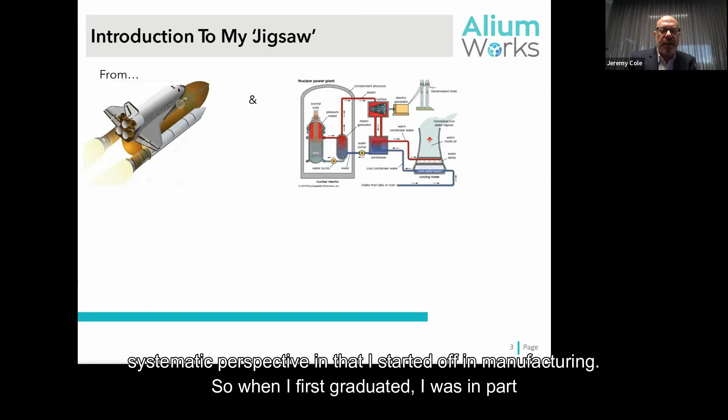I look at things through a very process systematic perspective, in that I started off in manufacturing. When I first graduated, I was part of a manufacturing firm that manufactured components used on the space shuttle, in nuclear power plants, oil and gas industry, etc. So therefore, failure was not an option on a number of those things.

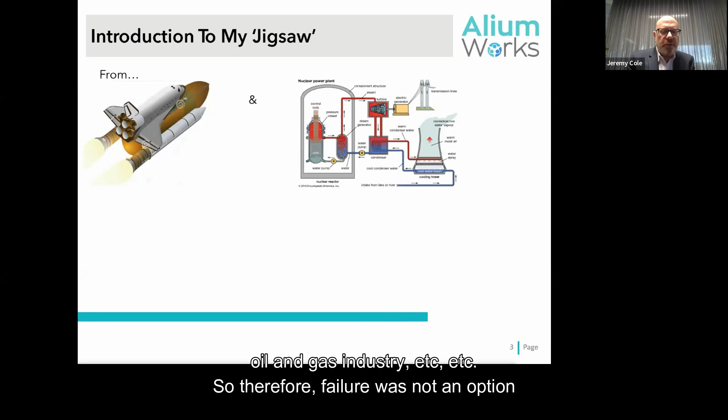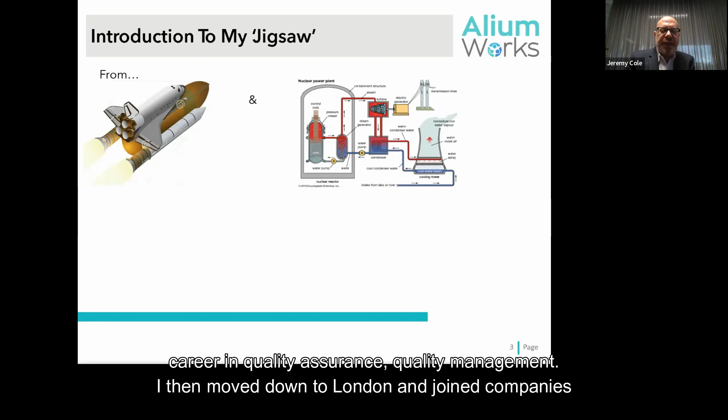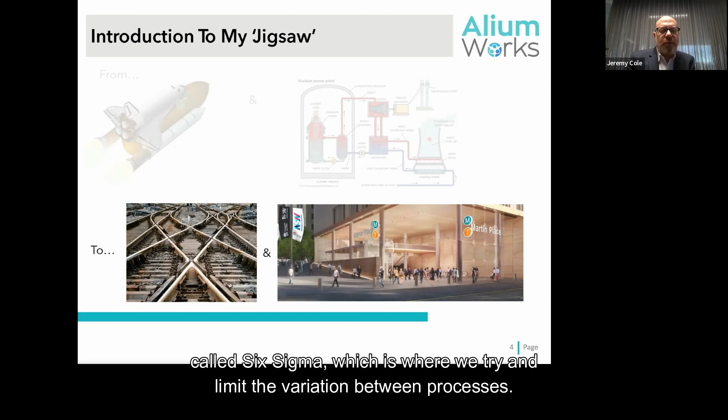I focused the beginning of my career in quality assurance, quality management. I then moved down to London and joined companies like London Underground, which then became Tube Lines. Joined the rail industry and focused a lot on something called Six Sigma, which is where we try and limit the variation between processes. But again, it was very systematic, very process orientated.

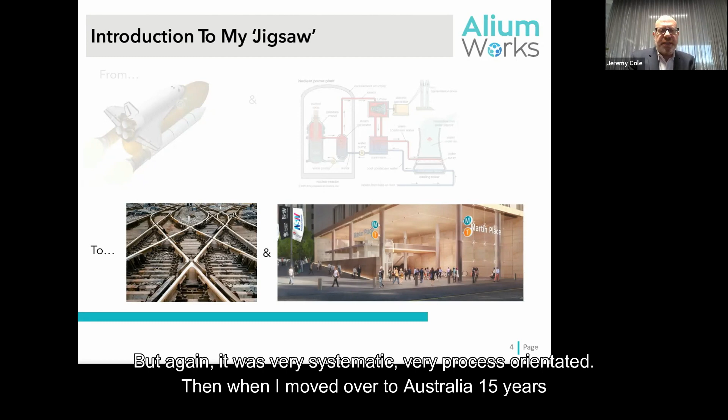Then when I moved over to Australia 15 years ago, I came into the rail sector, but looking at it through a construction lens. And that's where I find myself today, working in the construction industry, mainly looking at rail projects, but as Lend-Lease like to have their cake and eat it, they tend to get me looking at other projects as well these days. So it's not just rail projects.

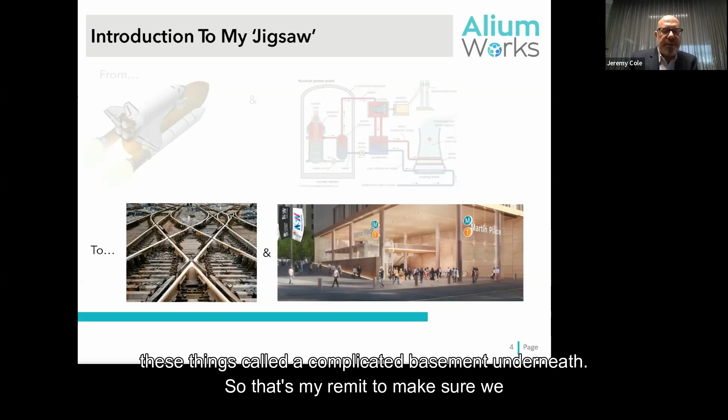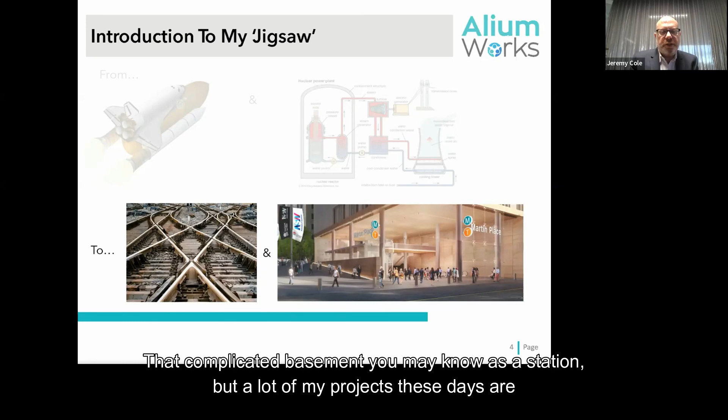And also, Lend-Lease don't do rail projects. They build large, shiny buildings, and they have these things called a complicated basement underneath. So that's my remit, to make sure we can open that complicated basement and link it up to the rest of the railway. That complicated basement you may know as a station. But a lot of my projects these days are the complicated basements underneath our nice, tall, shiny buildings.

So where did rail assurance really originate in this country? I always use the Granville rail disaster as my example. Happened almost 50 years ago, and what had happened is a train derailed, and as it was coming into the Granville train station, my understanding of that disaster was it derailed due to poor maintenance of the track.

However, that derailment, as bad as it was, got a lot worse when the derailed train struck the pillar that was holding up the bridge near the Granville train station. That in turn caused the bridge to collapse onto the carriages that had derailed, crushing them. So that ended up with 84 people dying. As a result of that, they realized they need to build rail infrastructure that considered what safety and what might happen and minimize those risks, but also make sure that the assets were fit for purpose.

So that leads me into what do we mean by rail assurance? I like to think of rail assurance as three pillars that support what we call a safety argument.

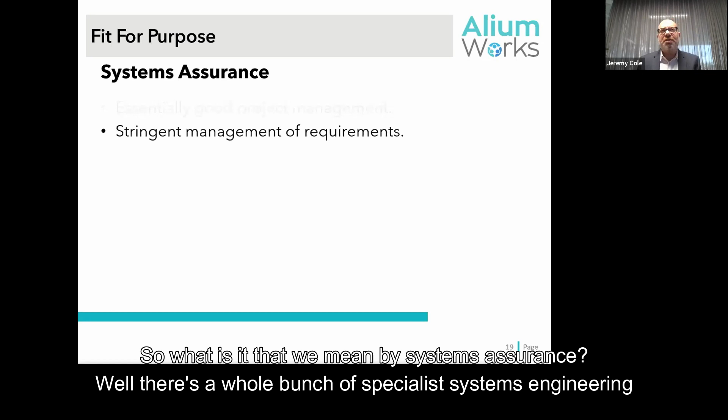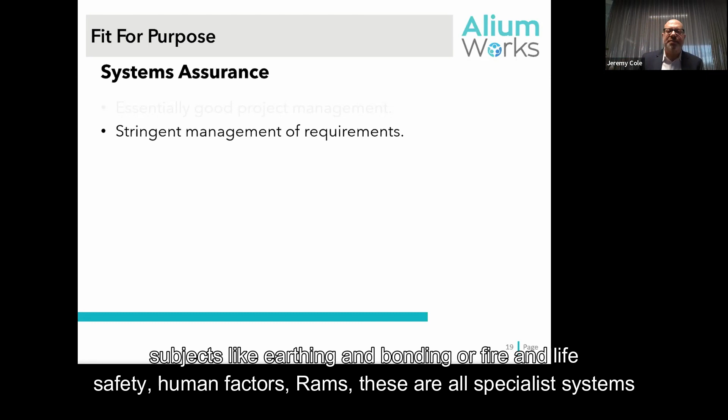So what is it that we mean by systems assurance? Well, there's a whole bunch of specialist systems engineering subjects like earthing and bonding, or fire and life safety, human factors, RAMs. These are all specialist systems engineering things that you need to consider during the design phase of a project.

You have a RAMs analysis undertaken, you have a human factors analysis undertaken. All of these specialist reports - security, blast, fire and life safety - all of these specialist areas come up with a report on how that design could be improved if you did a number of things. What they come up with at the end of it is saying, yes, I believe this design is safe from a fire and life safety perspective if we do X, Y, Z. So they're going to come up with a series of requirements.

There's also the original technical requirements that you get given when you do the project. So there's a number of different sources of these requirements, and these requirements could be the original technical requirements, the derived requirements that you come up with, the safety requirements - all these things. What is systems assurance?

Well, dumbing it down, and I'm sure there's people far cleverer than I am on this call who are nodding or shaking their heads vigorously because I've dumbed it down too much. But in my mind, systems assurance is simply about stringent management of those requirements.

By stringent management of those requirements, we mean there's traceable evidence to where we met that requirement in the design phase, where we met that requirement in the construction phase, where we can demonstrate we've still achieved that requirement at point of handover.

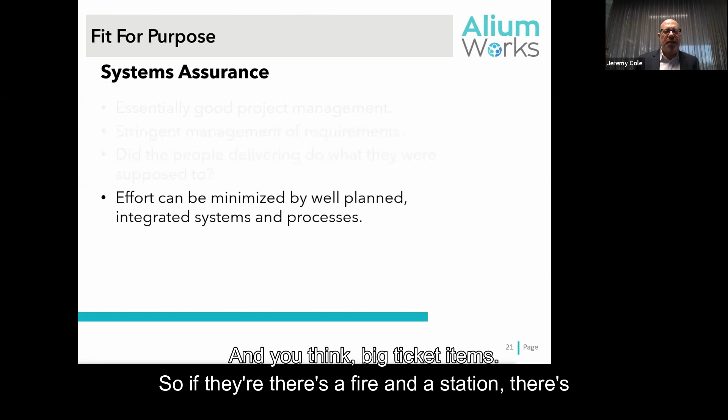Top down is systems thinking, how am I going to get the risks managed, and you think big ticket items. So if there's a fire in a station, there's a whole bunch of other systems that need to contribute to help mitigate the effect of that fire.

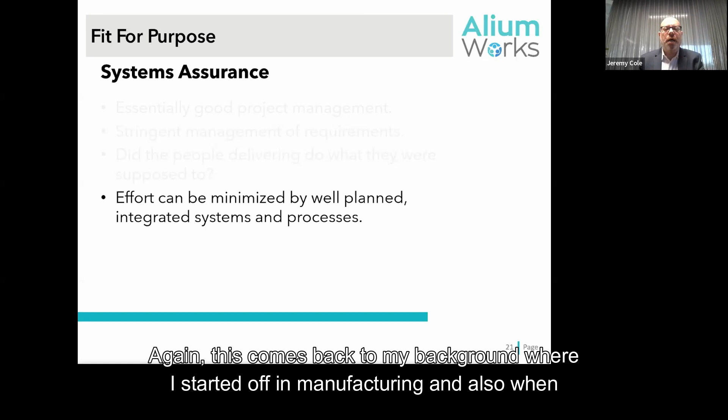Effort from systems assurance can be minimized by well-planned, well-integrated systems and processes. Again, this comes back to my background, where I started off in manufacturing.

And also when I came into the construction side of things, I started off looking after things like quality management, then moved on to looking after quality and risk, and then quality, risk, and project administration, which is all the document control stuff, and then started taking on things like safety assurance, commissioning, operational readiness.

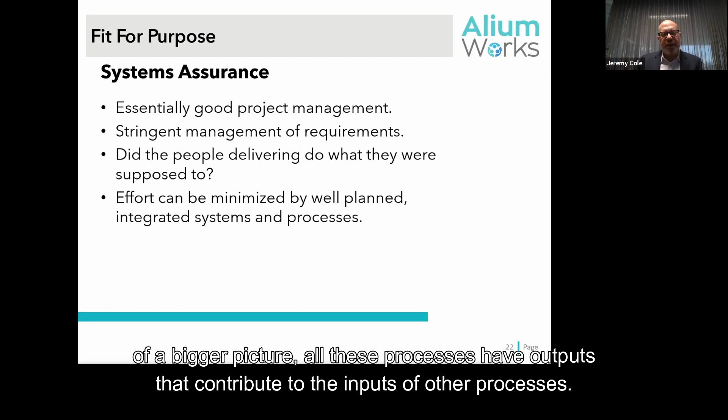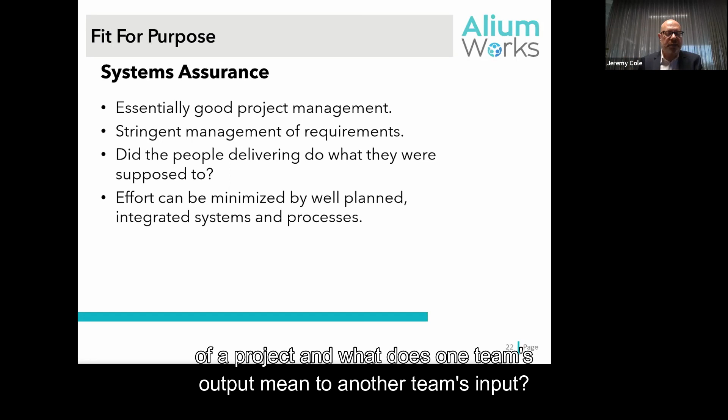And suddenly you realize everything is actually part of a bigger picture, all these processes have outputs that contribute to the inputs of other processes, and understanding how everything links together means you can think end-to-end life cycle of a project, and what one team's output means to another team's input. So if you plan and integrate your systems and processes well, it means good.

It means that your requirements management efforts are minimized. Finally, the third pillar is management of competence.

When I came into Lend-Lease and they were new to the AEO or TAO game, I had to say, look, you need to demonstrate you guys are competent to do the work that you're doing. They just guffawed at me because, quite frankly, they'd already been building these things for years.

Barangaroo is 9 individual buildings connected by a single basement, so it's 9 individual operating entities all integrated into one system. So yes, they can do that.

What I mean by management competence is we have an auditable trail to demonstrate that we've assessed someone to be competent.

For us at Lend-Lease, it was definitely a case of the difference between managing the delivery of the asset and being technically accountable for what's delivered.

So again, on an assurance framework, you are signing off quality records, and if you are signing off those quality records, you need to know what good looks like.

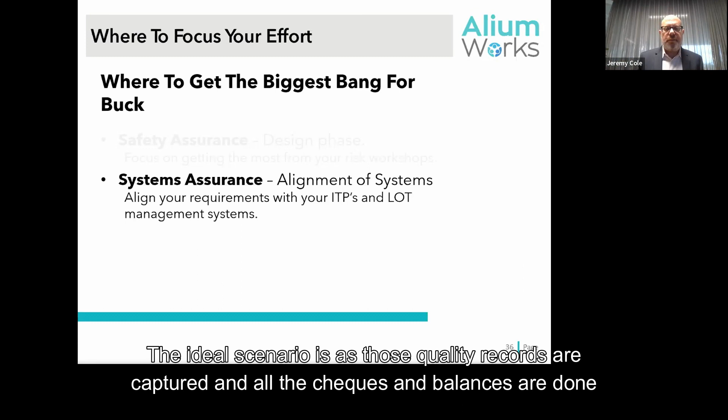The ideal scenario is as those quality records are captured and all the checks and balances are done, and you've got competent people in the quality team and engineering team standing up and saying yes, that quality record is complete and the ITP is closed - or rather, the ITPs are complete and the lots are closed. That should be your evidence: if the ITP was filled in, all the records done, the lot closed, and all the NCRs finished, I can rely on that and close out that associated requirement. You shouldn't need to go back and check everything's done because you've got competent people doing that already earlier in the process. So this is all about having linked up processes and competent people managing them, and a good systems assurance team should link it all up at the beginning, so that as you finish your quality records, by definition all your requirements are also closed.

Talked a lot there, I'll probably get a few questions on this one. So lessons that can be applied: managing expectations of output. That's building assurance into the procurement phase, and end of story - that's how we can make sure people are delivering what we expect them to deliver.

Also, when you're working on my side of the fence with the contractors, you're not surprising the consultants by expecting them to deliver more than they've actually priced. Being fair - a good project is where everybody wins. The design consultants make money, the contractors make money, the client gets exactly what they want for the budget they paid for, on budget or ahead of time.

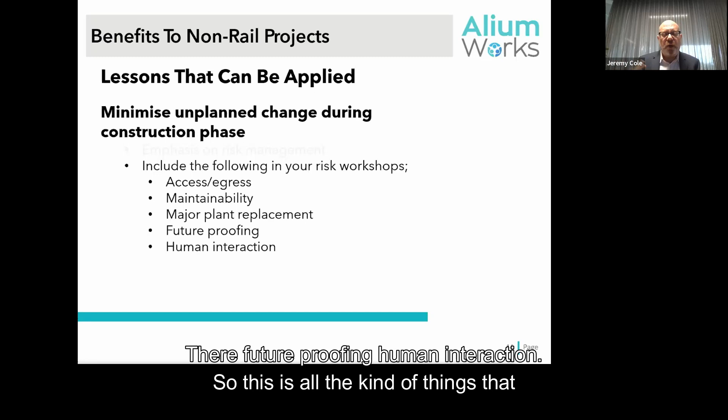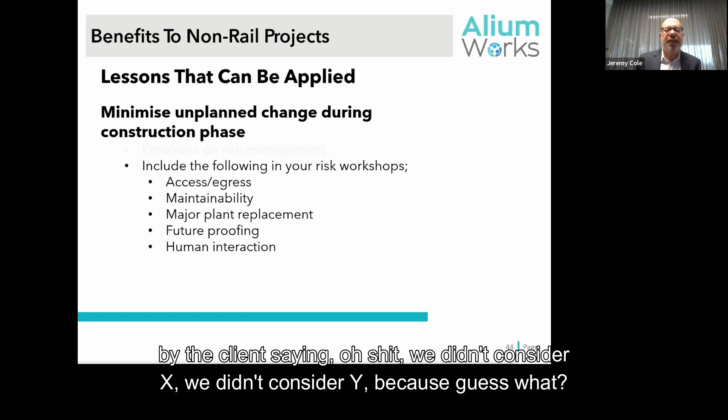Human interaction - this is all the kind of things that you need to consider earlier on, so that you don't have many variations and you don't get surprises by the client saying, oh shit, we didn't consider X, we didn't consider Y. Because guess what, you had all this opportunity to, and you've engaged the right people to do it.

This is my last point here. You've engaged the operators, you've engaged the maintainers, you've engaged the external stakeholders from a very early stage, so they've got as much ownership of the output as you do.

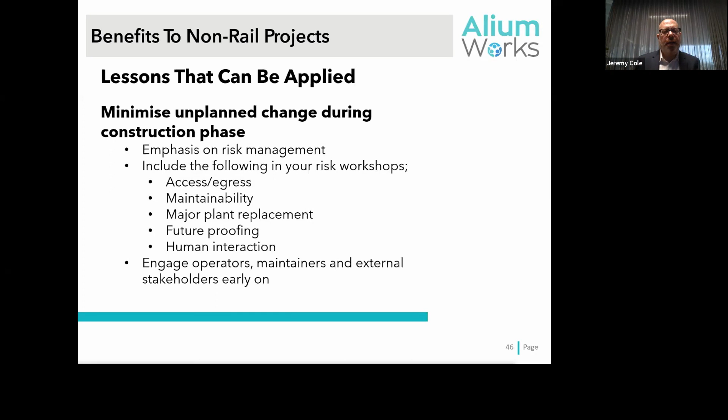This is probably the last slide. What are my key takeaways from this? Well, despite my background in manufacturing components for the space shuttle, this isn't rocket science. If it was, I wouldn't be the right person for the job. In my mind, it's actually quite simple - you just need to have a very high boredom threshold to manage it.

You need to clearly define your processes. You need to start at the top. You need to think about system safety when you're talking risk management. If you have a key risk of fire or whatever it is, and you understand how your systems interact, and you then cascade that risk down into the different locations, you make sure everything works together.

You can have individual location specific risks, and also as you introduce certain controls, you introduce other risks. So look, it's not clean, but if you have a good process and you follow that process, it can be done. Involving the end users from the start, engaging the operators and maintainers - you carefully manage change. Change happens, but just manage it.